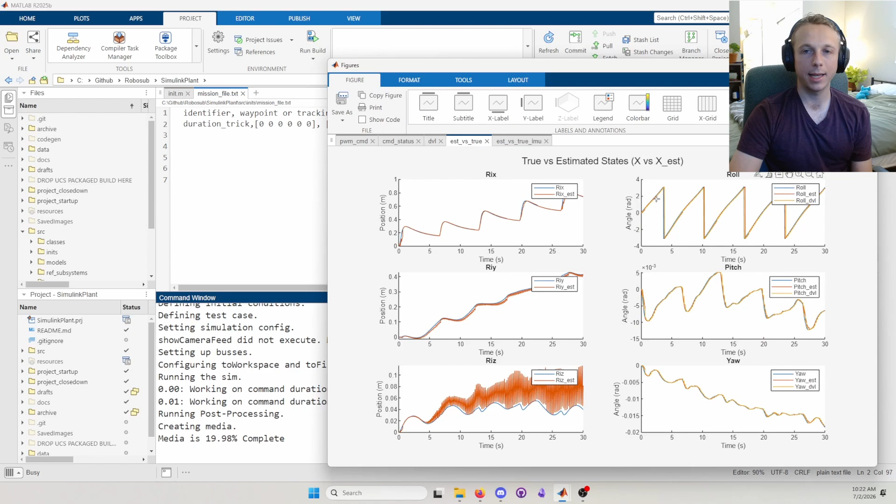Hi, I'm Kory Haydon, one of the engineers on the controls team for Cyclone RoboSub. I'm going to show you how we use MATLAB and Simulink to design, tune, and validate our robot. Our primary innovation with the introduction of MATLAB to our workflow is our ability to rapidly switch between 3 distinct operational modes: fully simulated, tethered, and untethered. This allows us to reliably and repeatably test the robot controller across a wide variety of test cases, making the transition from simulation to reality seamless.

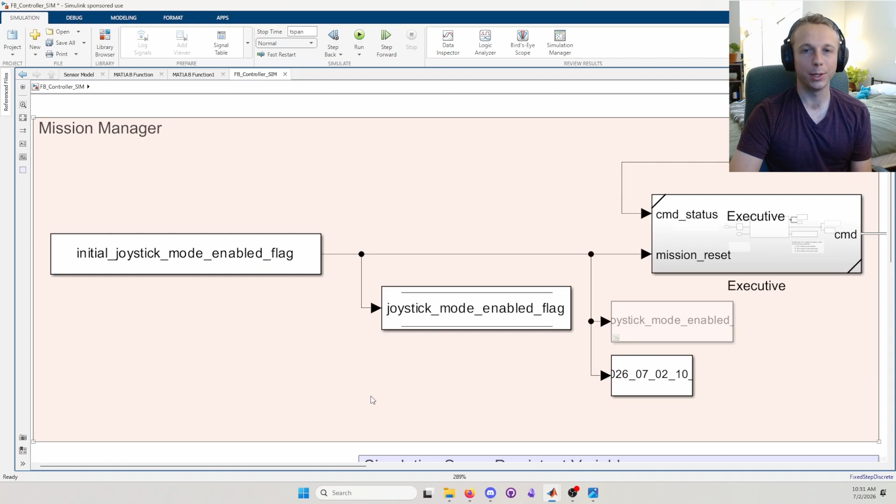Here's one of our fully simulated models. Let's start in this pink subsystem on the left. This section is the mission manager. The responsibility of the mission manager is to determine what Manny's current objective is and translate that into a waypoint for Manny to drive to. Here we have the low-level controller. This model takes commands from the mission manager and translates it into specific target vectors for the PID controller.

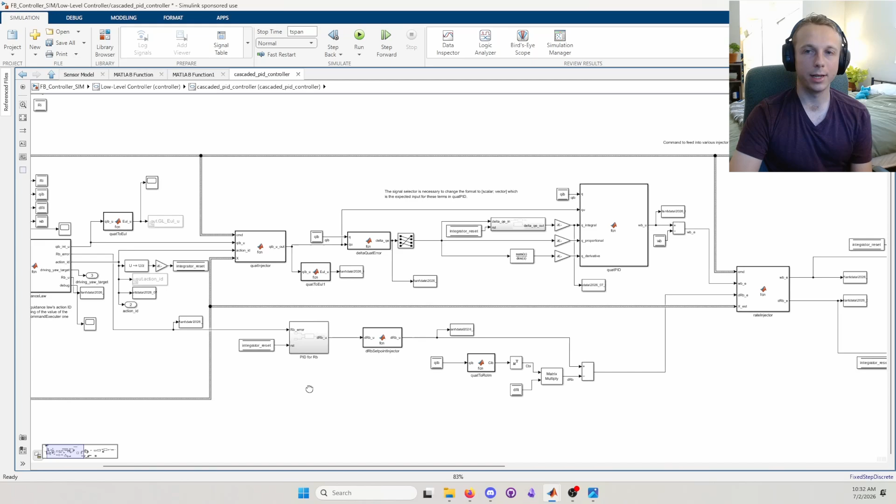The PID controller is by far our most complicated subsystem. It is actually 4 PID controllers arranged in a cascaded fashion to allow finer tuning and more transparency of the control logic. Throughout the PID controller, injector blocks have been added. These blocks let us trick the controller into operating with a fixed state error, which is very useful for tuning.

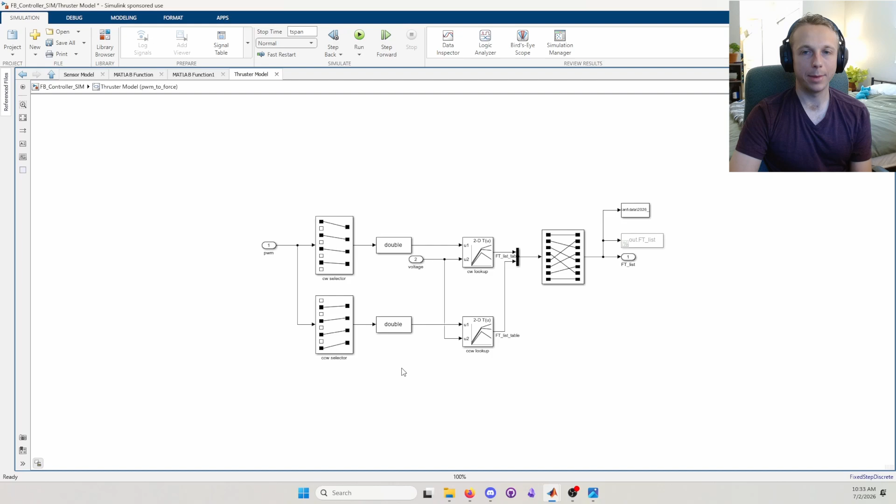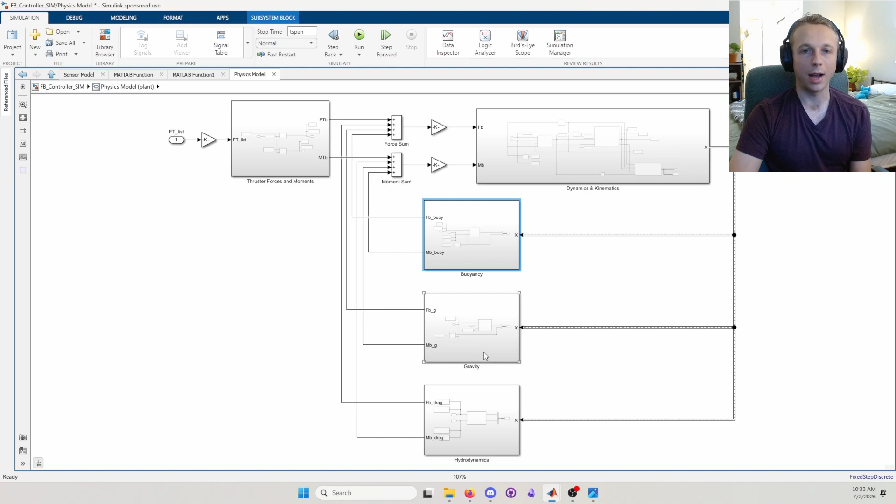The PWM outputs of the controller are sent to the plant model. The plant simulates thruster forces, drag, buoyancy, hydrodynamic added mass, and gravity, with a 6 degree of freedom dynamic simulation using quaternion kinematics. We started with an analytically determined best guess for the various physical parameters needed for the simulation, like drag coefficients and moments of inertia, then iteratively improved our guesses using pool test data.

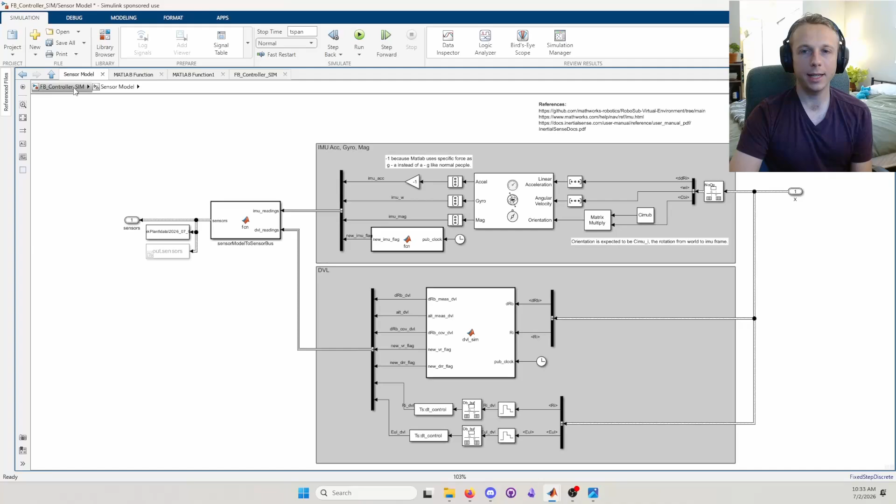The simulated controller is only useful if it works on realistic sensor data. For this purpose, we built a sensor model subsystem that simulates the IMU and the DVL, with added sensor noise and drift. We also use an Unreal Engine co-simulation to simulate the camera feeds, which I'll talk more about shortly. The simulated sensor data gets fed into the state estimator and the work-in-progress video processing subsystem, which combines the DVL, IMU, and in the future camera data to estimate Manny's position, attitude, and rates in the pool to enable feedback control.

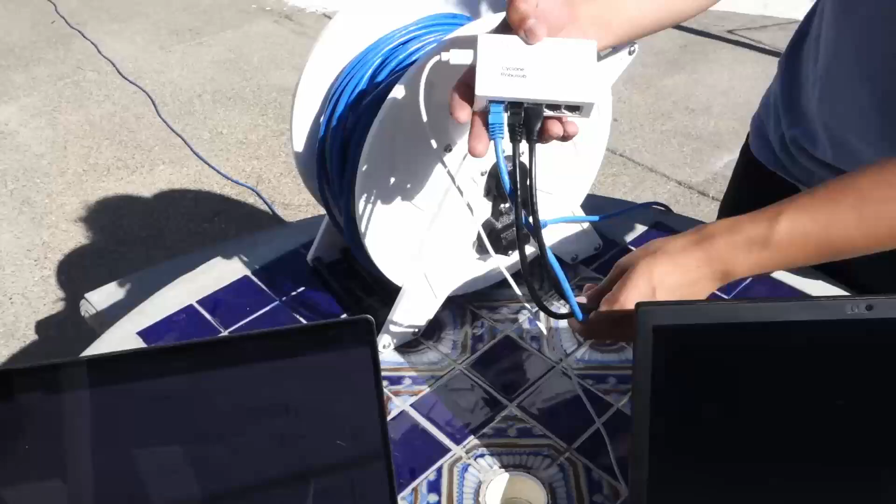After validation and simulation, we moved to the tethered control mode. In this mode, we use the Ethernet tether connected to the robot to test it on the workbench or in the pool from a computer running MATLAB. This lets us run hardware in the loop and controller in the loop tests on the real hardware while taking advantage of MATLAB's debugging, tuning, and data visualization features. We can either use the controller in MATLAB while controlling the real robot, or use the controller on the robot while controlling a simulated robot.

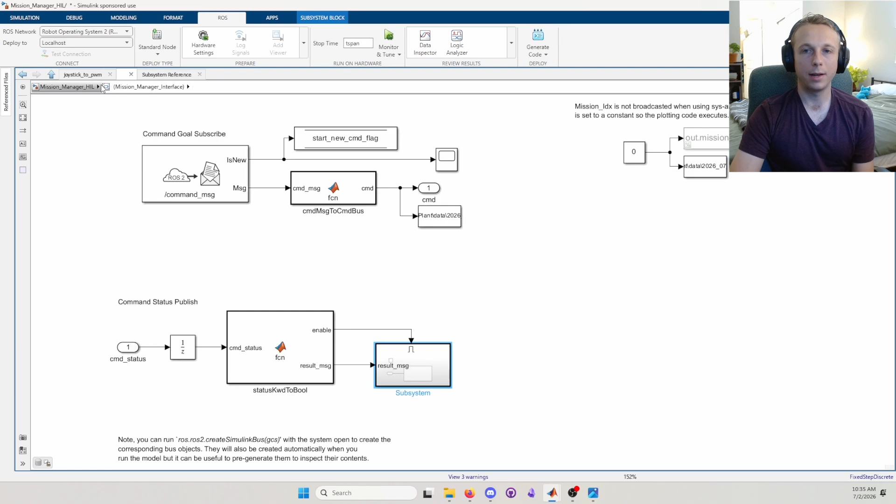This functionality is enabled by MATLAB's Robot Operating System, or ROS toolbox. We use ROS to send PWM commands to the software team's code that runs the robot's Raspberry Pi. This is one of the Simulink models we use for the tethered mode. The structure is similar to the fully simulated model. However, the connections to the dynamic sim and the sensors have been replaced with ROS blocks connected to the real robot.

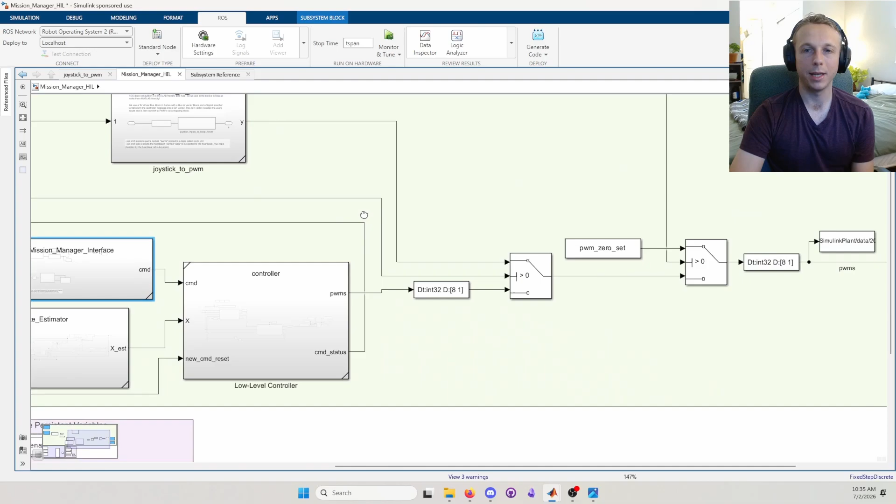We also added the remote control with a video game controller in tethered mode. We use this mode primarily for pool testing to drive the robot back to the starting point between autonomous runs, but we can also use it for research deployments and to gather computer vision training data.

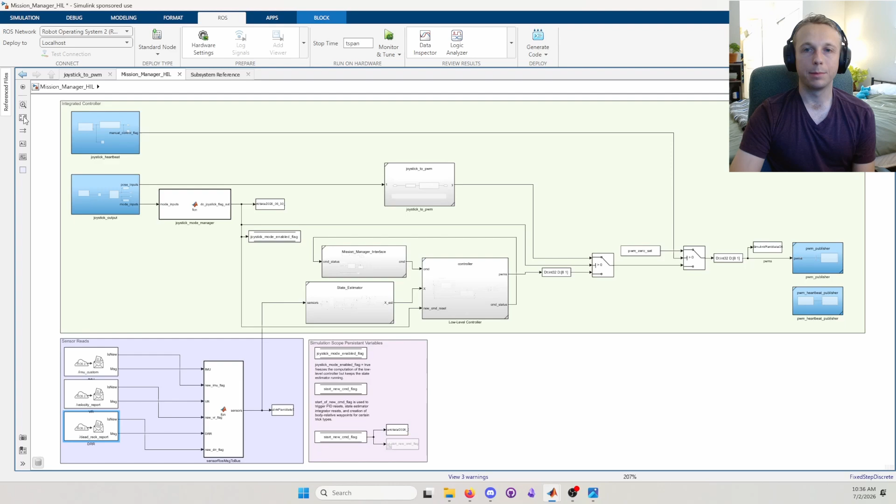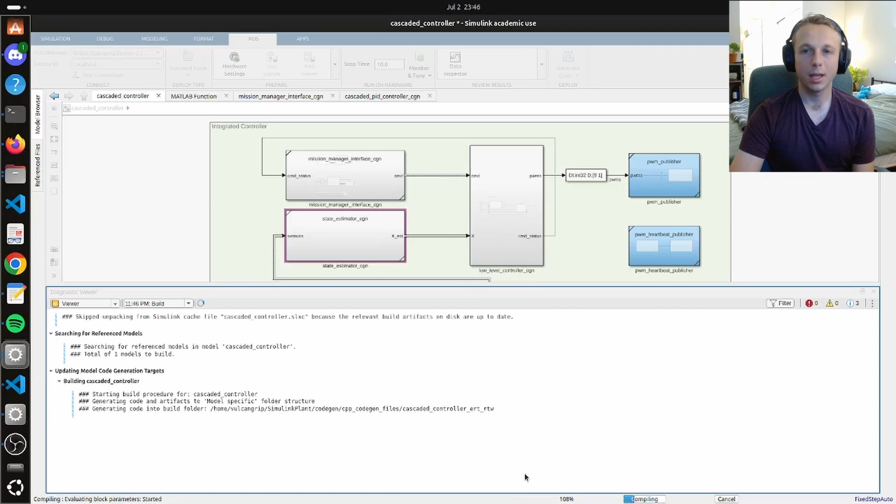So our controller has passed all of our tests in simulation, and it's passed all of our tests while tethered. We need to take all our MATLAB code for the controller and sensor fusion and translate it into C++ to run on the onboard Raspberry Pi. For this, we use Simulink Coder to automatically generate ROS2 nodes from our Simulink model. So far, we've successfully validated and run with a reduced scope using dead reckoning for navigation. We accomplished our goal of creating a system to deploy, validate, and test our controllers in real time with the help of the ROS toolbox within Simulink.

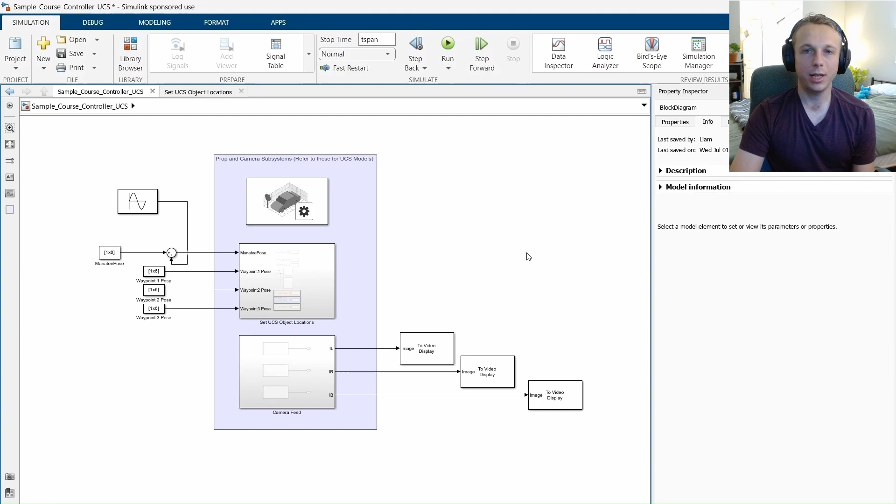Our stretch goal for this year's competition is the completion of the computer vision subsystem. This is the Unreal Engine simulation we have constructed. Here, we have models of the pool and various tasks, as well as more accurate lighting, caustics, shadows, and underwater image distortion. We can set Manny's position, attitude, and rates using Simulink blocks from the Simulink 3D Animation toolbox and the Unreal Engine with Simulink interface plugin.

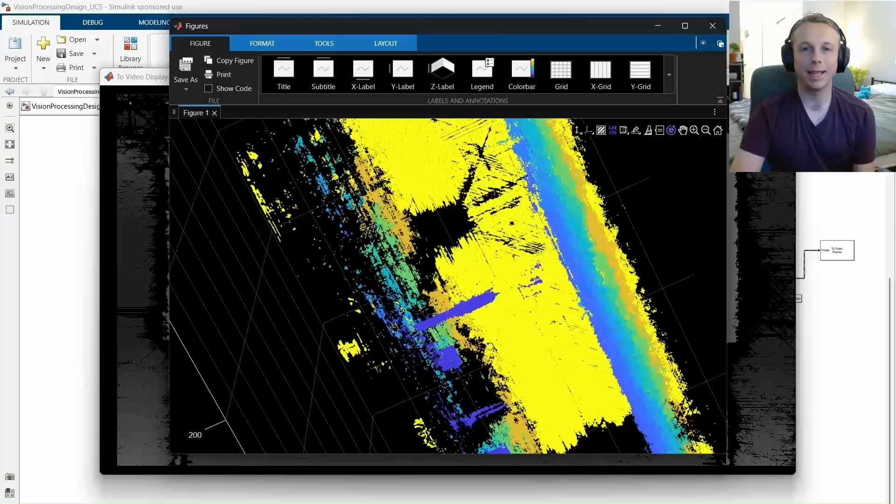We built this simulation before we realized an Unreal project file was being provided to us by MathWorks for the competition, which proved an excellent learning experience for our team members. We are currently developing systems to do edge finding, object detection, and range and bearing stereo vision measurements using MATLAB's Computer Vision Toolbox with simulated data from Unreal Engine.